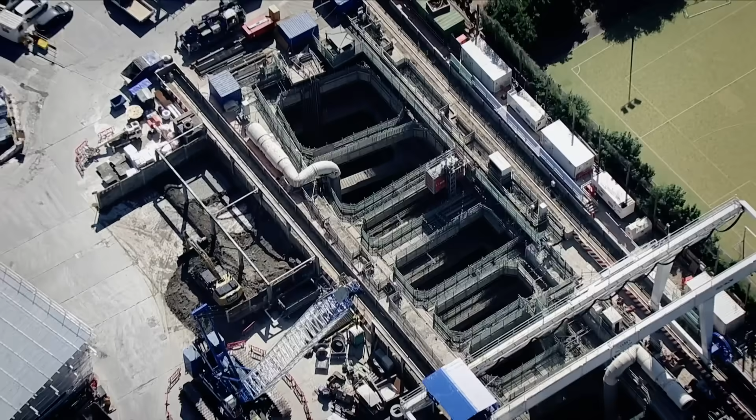In this episode, an incredible rail network driven through London's historic heart. The new Crossrail trains will carry 200 million passengers in and out of London every year. It's very exciting. Pushing urban construction to its limits. These machines allow you to pump 60 tonnes an hour. It's quite an art to see.

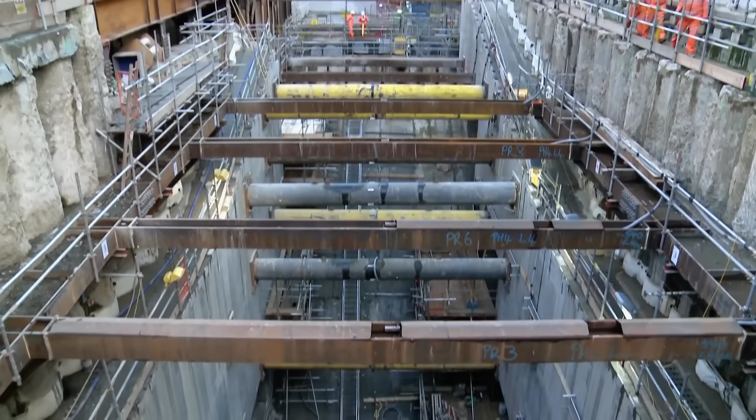And the innovative pioneers of the past. It's amazing that they were able to build this bridge in this torrent. I love the Industrial Revolution. That made the impossible possible.

London, one of the world's most populated and densely built megacities. This mighty metropolis covers an area of nearly 1,600 square kilometres. But now home to almost 9 million people, with a further 31 million visitors each year, this cosmopolitan capital is grinding to a halt.

It's a problem that engineer and commuter Camilla Barrow experiences every day. London's a fantastic place to live. Everyone wants to be here. There's a lot going on. However, catering for these people in terms of transportation is critical, and as you can see right now, it's bursting at the seams. Every day, more than 11 million journeys are made on London's transport network, including 3.5 million on

the London Underground alone. The current London Underground is about 150 years old, and it's a fantastic system and caters for a large capacity. However, it was never anticipated that it would cater for this amount of people. To solve this seemingly insurmountable problem, engineers have embarked upon Europe's biggest construction project.

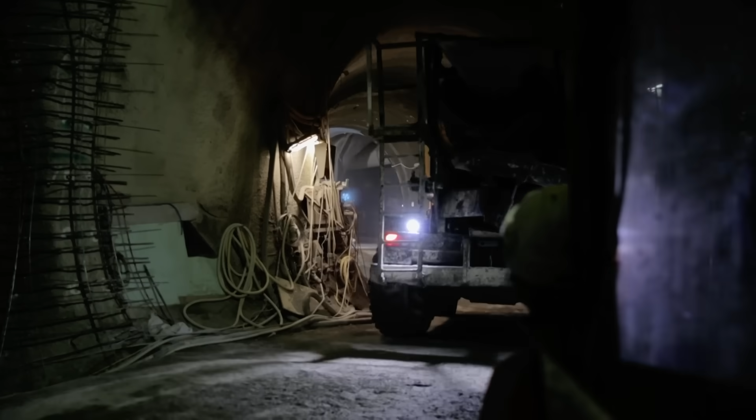10,000 workers spread across 40 different construction sites are creating a brand new rail network straight through the capital's heart. For Operations Executive Michael Bryant, this project presents a series of complex challenges. London's infrastructure is 300 years old, and underneath London is a veritable labyrinth of tunnels for all sorts of purposes. It literally looks like a hairnet that's been screwed up.

It's extremely complex. Lots of the buildings now, particularly the large buildings like the Shard, have piles that go down 20, 30 or even 40 metres down into the chalk level. So it really is like threading a needle.

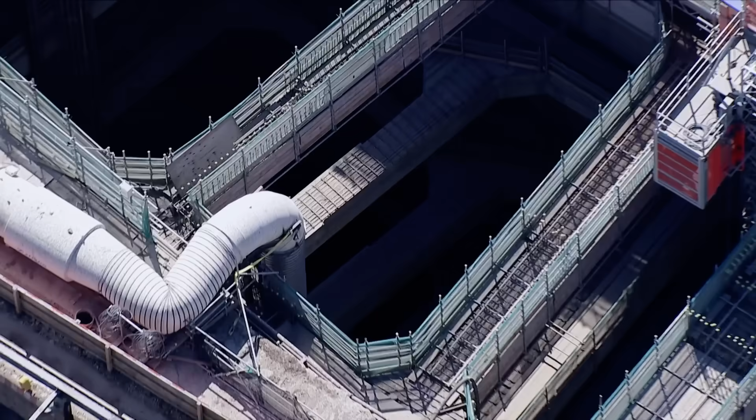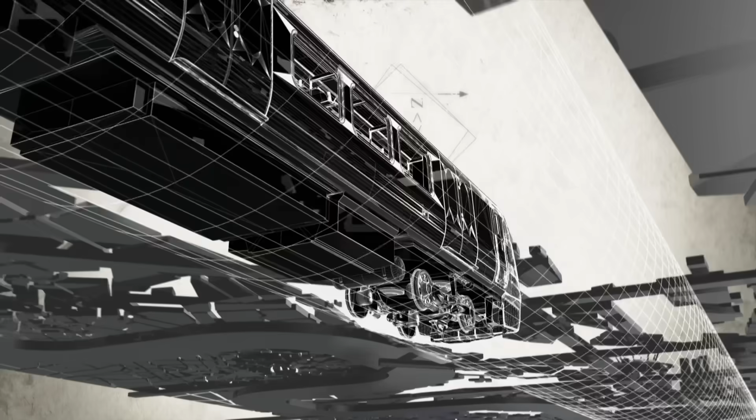Stretching 118 kilometres, the network will pass through 40 stations, from Reading and Heathrow in the west to Shenfield and Abbey Wood in the east. Featuring an astonishing 42 kilometres of freshly dug tunnels, intricately woven through the existing underground rail system and deep building foundations of this complex subterranean world.

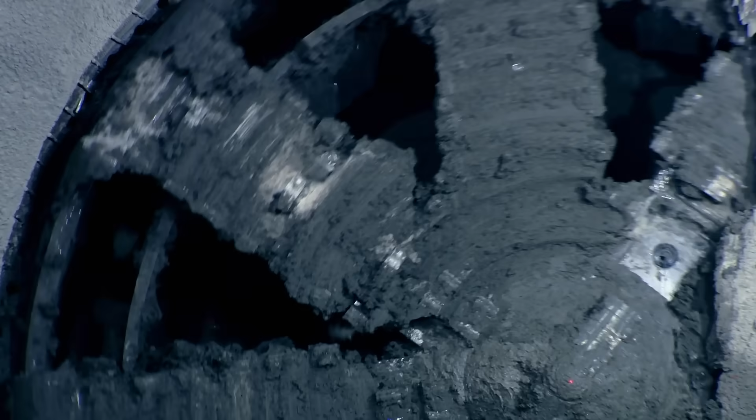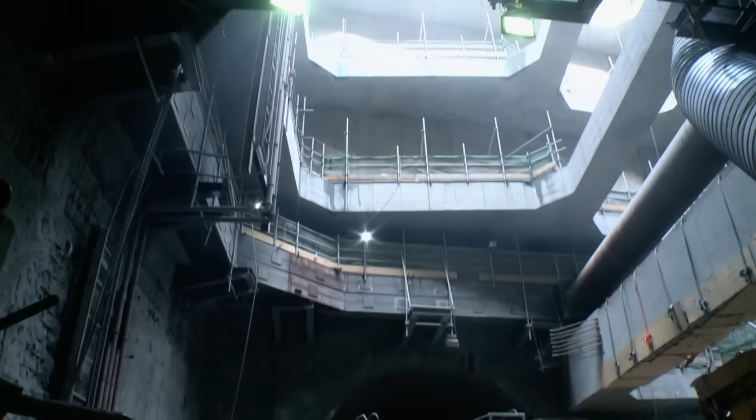In 2012, 8 gigantic 1,000-ton tunnel boring machines operating 24 hours a day, 7 days a week, begin creating this new network. Right now, Crossrail is a mega project. It's very complex. It's costing approximately £15 billion. It's probably the type of challenge that a civil engineer would dream of through most of his or her career.

And not only do these engineers need to find room for 42 kilometres of new tunnels, but also create space to accommodate 10 brand new stations. The most vital of all will serve one of the world's leading financial districts, Canary Wharf.

One of the biggest problems when we wanted to bring Crossrail to Canary Wharf was finding the space to do it. All of the land is full, as you can see up there, so the only place to do it was in the water. The challenge was to deliver a concrete box 28 metres below water level. The option of failure just did not exist.

So, how do you create a brand new station deep in the water of the River Thames? To realise that seemingly impossible challenge, engineers would take inspiration from some of the greatest innovators of the past.

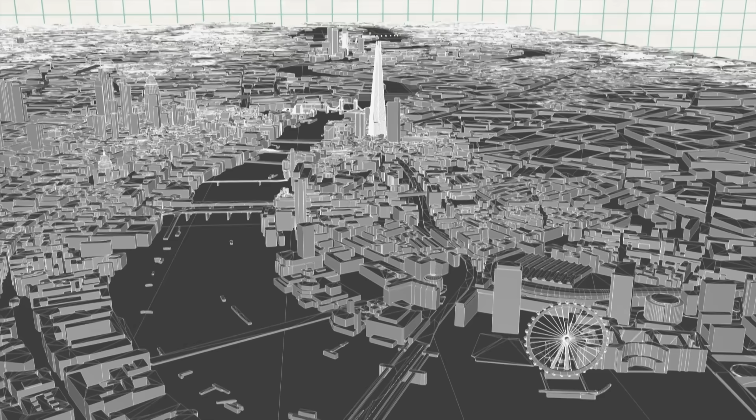Travelling along Rome's River Tiber, Professor Rees-Morgan is in search of an ancient structure that has withstood the power of nature for millennia. Oh, wow. It's amazing that they were able to build this bridge thousands of years ago in this torrent. Oh! Constructed in 62 BC, the Pons Fabricius is the oldest Roman bridge still standing.

Oh, wow, that was fantastic. I'm totally soaked. There's a real strong current there. The foundations must be extraordinary to deal with that river. Thousands of floods, earthquakes, countless wars, and millions of horses, carriages, and people have all put pressure on the foundations of this bridge. But still, it endures.

It was commissioned by Lucius Fabricius, the curator of roads, after the previous wooden bridge had burnt down. The very core of the bridge, the foundation in the centre, is where the clever bit happened over 2,000 years ago. Unable to simply stop the river and drain the water out so they had a dry environment to build on, the Roman engineers had to come up with a revolutionary method of building while the water was in full flow. What they designed was ingenious.

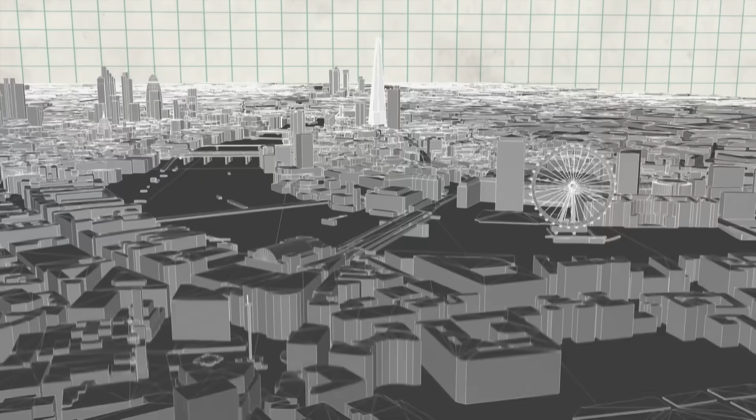The ingenious use of a cofferdam at the Pons Fabricius means this 62-metre bridge still stands as a testament to Roman innovation. When it came to building solid structures in the water, Roman engineers really did make the impossible possible. The engineers at Canary Wharf in London take the Romans' cofferdam and employ it on a gigantic scale.

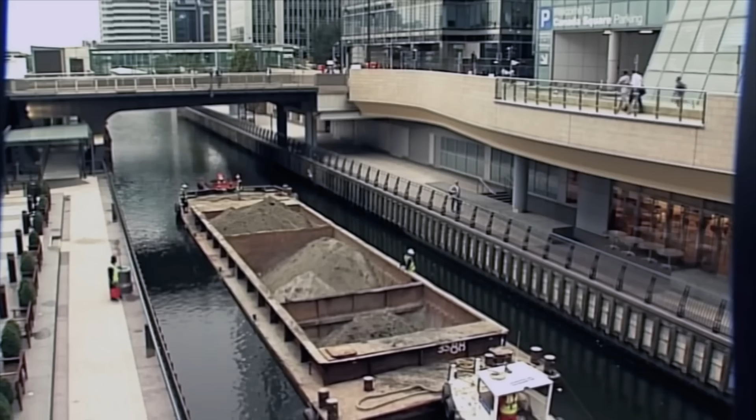To build a brand new 250-metre-long station in water, engineers drive nearly 400 18.5-metre-long tubular steel piles into the dock floor to create a state-of-the-art cofferdam, vastly bigger than that used at the Pons Fabricius. But constructing it isn't without its challenges, especially when leading financial institutions with sensitive trading floors are your neighbours.

The traditional method of creating a cofferdam is actually to hammer steel members into the ground. And as you can imagine, that makes a lot of noise, a lot of vibration, creates a lot of dust, major disruption. So we had to come up with something that was better. The answer to their problem is a brand new technique of silent piling. Instead of hammering the piles, a state-of-the-art Japanese machine called a Giken is used.

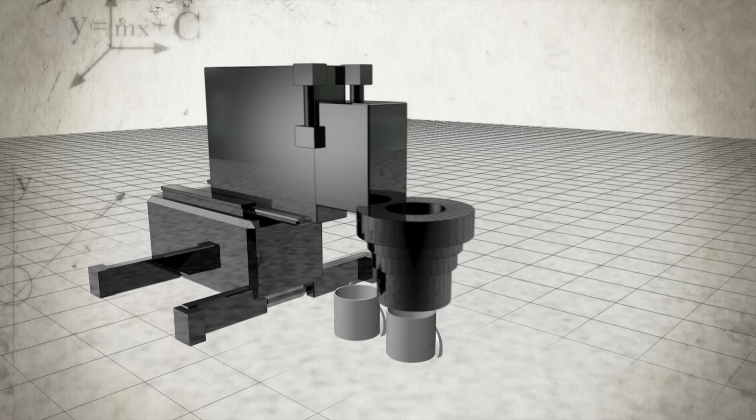Weighted to the dock bed and using powerful hydraulics, it silently twists and pushes the first 3 piles into the ground. It then crawls across and secures itself to those piles, using them as anchors, before pushing in the next one. This process is repeated until the cofferdam wall is complete. We went for the first 3 years of the project without a single complaint from any of the neighbours.

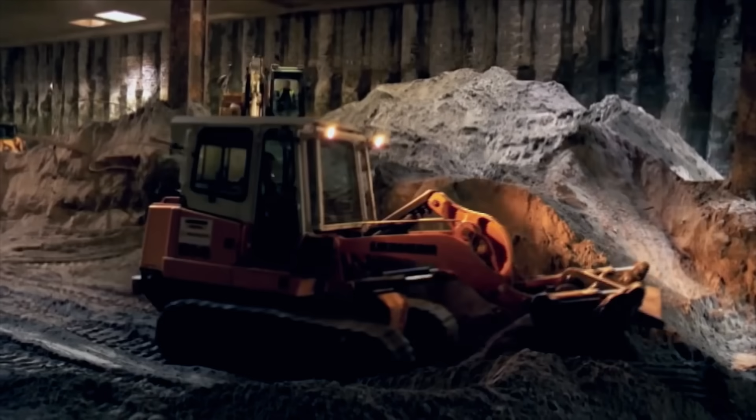Once the cofferdam walls are in place, engineers can begin the mammoth task of removing the water. Over the next 5 weeks, we progressively took out 98 million litres of water from the cofferdam, and that's equivalent to 40 Olympic swimming pools. 300,000 tonnes of material are then excavated, until finally engineers reach a solid foundation, 18 metres below, from which to begin construction.

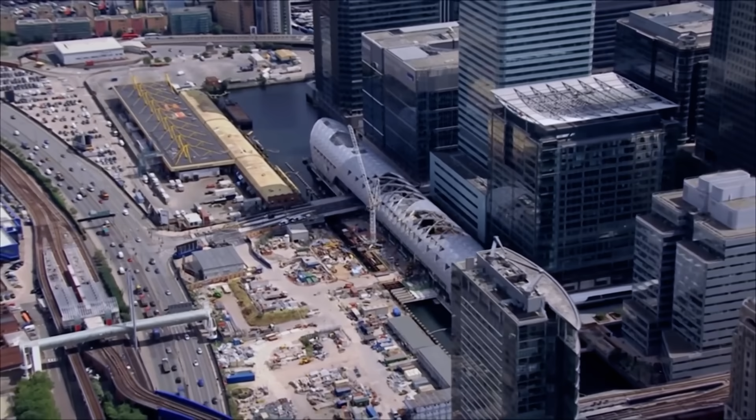When fully operational, this £500 million station will be one of the largest and busiest on the new network. So we have 4 floors below water, a floor at water level that we call promenade, and then there's 2 floors above and a roof garden.

At maximum capacity, 24 trains an hour will carry a staggering 68,000 passengers a day across the network, quicker than ever before. To deliver this station ahead of time and within budget is a monumental achievement, and we're helping London take the next step forward.

But creating this mega station is just part of the £15 billion project. To complete the network, engineers will need the innovative trailblazers of the past. For centuries, Dieppe had significant maritime importance. French explorers have left here to travel the globe. To help create more impossible engineering.

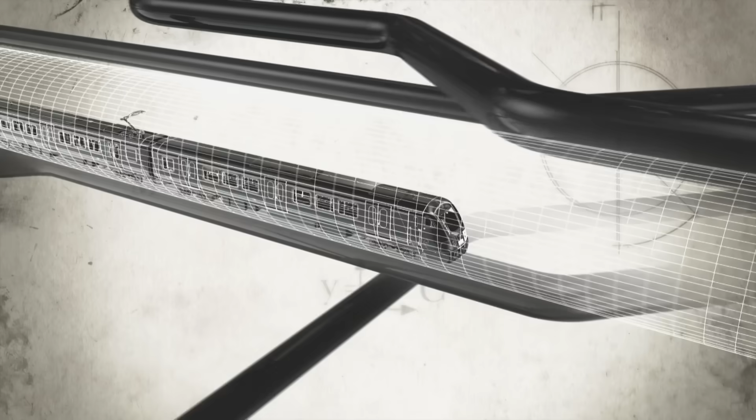Deep below the surface of the UK's capital city, Europe's biggest construction project is underway. 42 kilometres of tunnels and 10 brand new stations, threaded through a complicated and busy subterranean world. Crossrail will enable an extra 1.5 million people to enter or be within 45 minutes of central London. It's a fantastic project. You're working with some of the top expertise in the industry. It's very exciting.

But creating a colossal new railway above and below one of the planet's most densely packed cities throws up significant engineering challenges. The most obvious issues with building a project as large as Crossrail within central London is working around this massive infrastructure that's already in place. We've got people living here, people working here. So we aim to really minimise the amount of disruption to the people, the noise, vibrations.

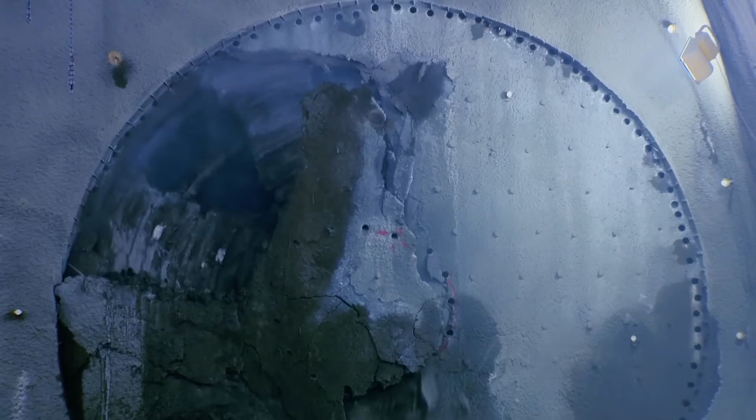Carving out this labyrinth 40 metres underground requires 8 £10 million supersized tunnel boring machines, each 23 feet in diameter and as long as 14 London double-decker buses. For project manager Jules Boyd, making sure London's infrastructure and residents remain unimpacted by these enormous excavations are top priorities.

One of the constraints on the Crossrail operation, which is a massive operation, is to virtually pass by unnoticed to our neighbours. This is Finsbury Circus, a little oasis within the City of London. The buildings around us are old, they're sensitive, some of them are listed.

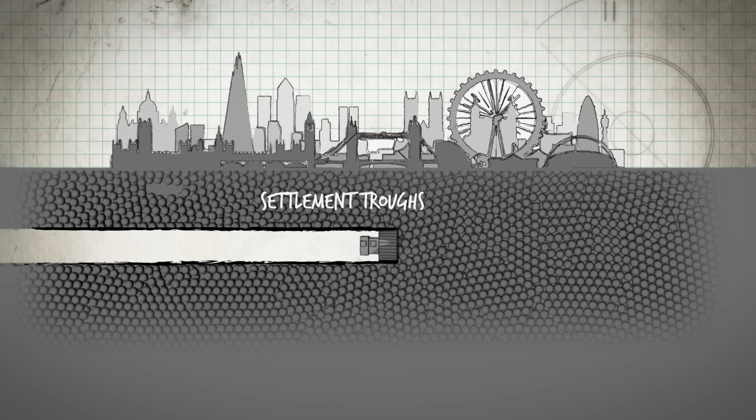When the tunnels are dug, problems can occur as the surrounding earth resettles, causing cavities or settlement troughs to appear. If the settlement trough increases, a building's foundations could shift, causing structural damage. This is a real historical centre of London, and it has to be protected. So how can engineers keep these ancient buildings safe? It's a challenge that would require some inspiration from the great innovators of the past.

Tunnelling under cities isn't new. In the 6th century BC, to have a supply of fresh water that couldn't be cut off by enemies, the residents of the Greek city of Samos dug underground aqueducts.

They must be getting thirsty by now. Cheers!

The soft volcanic rock beneath Naples meant huge networks could be dug for businesses, churches, and even a theatre, where Emperor Nero is said to have performed.

Ooh, he's on fire tonight.

Limestone mining under Paris created tunnels for what would become the world-famous catacombs, where the bones of 6 million former inhabitants now reside.

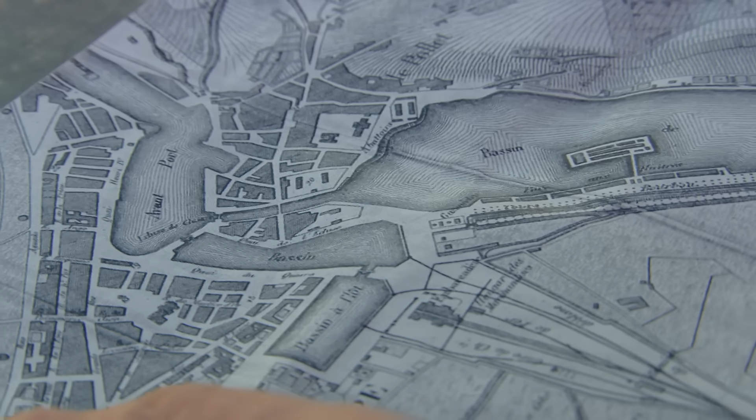I've got a couple of maps here of the old harbour, and it's changed significantly over time. But what I'm looking for is a particularly important sluice gate that helped the big ships come into the port behind me. It must have been just about here, because as I walk around, I can see from the old buildings we come to much more modern buildings, and it's really open. And I imagine it would have been just around here. This large sluice gate would have opened, allowing the ships to come in and out of the harbour.

The gate had been constructed to stop the build-up of silt and pebble deposits, and was a vital tool in keeping the harbour entrance clear. It was around about the end of the 18th century that the sluice gate stopped working, and this had a real impact on the economy. The gate foundations no longer held their weight, causing them to stop working. Luckily, in 1802, French civil engineer Charles Berigny, employed to manage the harbour, had an inspired idea.

So this is my demonstration of the sluice gate and the problem that was happening underneath. First of all, we had the rocks on the bottom of the seabed. On top of the rock was a softer top layer. And it was on top of this softer top layer that the foundations of the sluice gate sat. Now the problem was that the water coming in through the harbour was going underneath the foundations of the sluice gate, and it started washing away and eroding the softer particles of the top layer. And that meant that the foundations of the sluice gate would be destabilised, and ultimately the sluice gate stopped working.

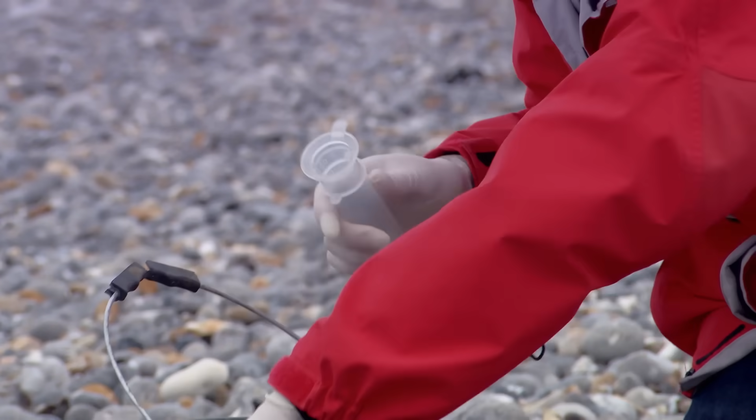Berigny's solution to the problem was brilliant. First of all, Berigny drilled a series of holes 5 foot deep through the foundations of the sluice gate down into the soil where it had eroded away. And then, this was the really ingenious bit, he got a piston pump, what he called a blow pump, and he filled that with clay grout. And with a series of hammer blows, he forced the cement down into the soil below.

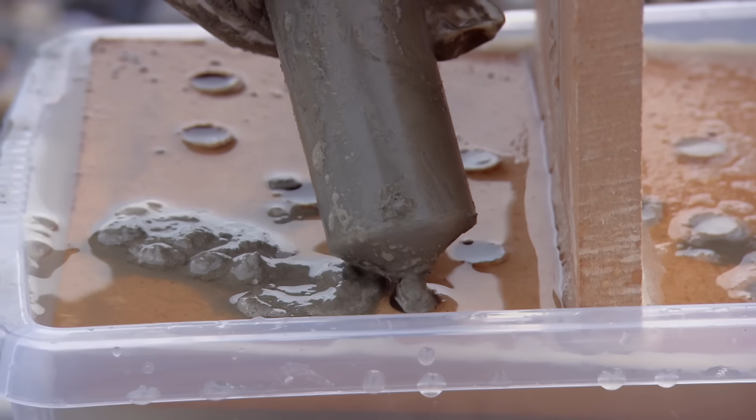This is getting a bit messy, so I'm just going to squeeze it. Down you go, in you go. The cement's pouring through the holes, filling up the subsoil below, and making those foundations nice and stable. As Berigny's clay grout was hammered through the pre-drilled holes, it spread out beneath the masonry foundations, squeezing into and filling the gaps created by the erosion. After a period of time, the grout set hard.

Okay, we've left it a while. We're going to see how it's set. Wow, it actually has worked. God, I really didn't think it was going to work, but that's fantastic. And unlike the soil, which was washed away, because it's solidified, it just stays in place, and that would have really helped the foundations of the sluice gate.

After minor tweaks to the technique, the grouting was completed, and the work proved a resounding success. This was the very first example from Charles Berigny of injection grouting, and it's used in civil engineering projects all over the world today. Fantastic.

Engineers at Crossrail have taken those early injection techniques and developed one of the most sophisticated systems in the world, one which begins above ground. Up on the corner of this building, there is one of the many ATSs. There's another one up here, and you'll see targets. These are essentially prisms. High-tech surveying instruments known as automatic total stations, or ATSs, are placed strategically across the city.

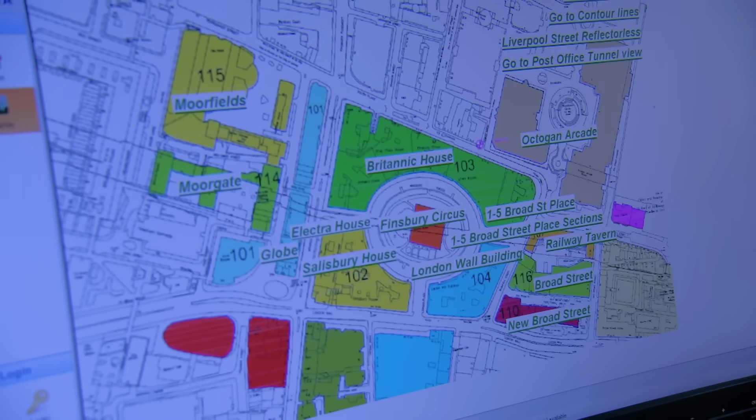The ATS fires a beam of light at its reciprocal prism. Engineers use specialized computer software to continuously measure the angle of the beam. If the angle changes too much, this can indicate a shift in the foundations. If any of these points starts moving, then the grouting program can be tuned to actually compensate for any settlement.

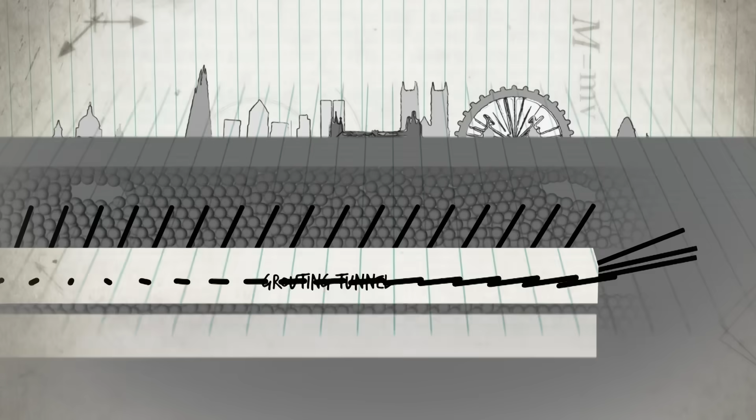Below the ground, in a purpose-built grouting tunnel, the team are busy reacting to recent information received from the ATSs above. At 3-meter intervals along the length of the grouting tunnel are a series of injection pipes that fan out above the construction work and below the delicate buildings. Getting the grout to where it's needed is the job of Principal Engineer Cliff Kettle.

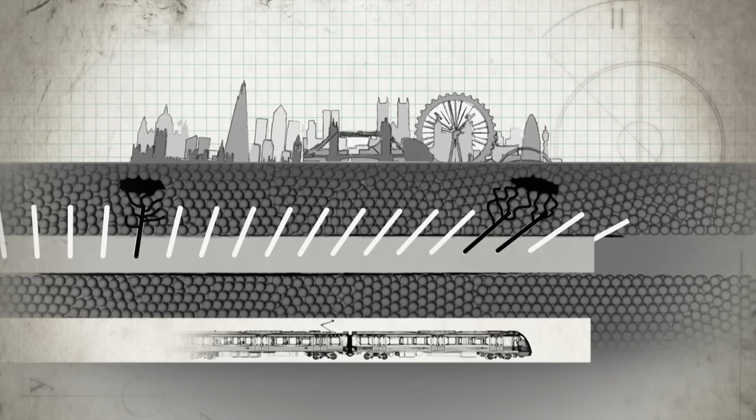So grout comes via the injection line from the piloted pump. It will come up this borehole. We'll isolate the individual sleeve. This rubber sleeve will push open. The grout will exit here and fracture the ground, and it will go into the ground. As the injection rods are pushed into position, up to 25 litres of grout at a time are forced out through the rod and into the fissures of the ground, ultimately levelling the foundations and lifting the building back into place.

Some of the facades of these buildings here are 70,000 tonnes. We see on a daily basis that just the injection of maybe 3 or 4 cubic metres of grout can move that building several millimetres. Spanning 5 years, it's the biggest compensation project the world has ever seen. Compensation grouting is absolutely vital for the project because it does something that there is no other process for. There are many locations across Crossrail where the excavation couldn't have been completed without the protection provided by compensation grouting.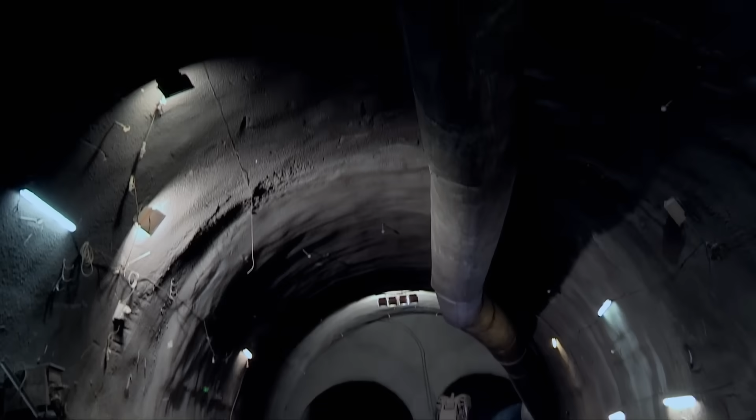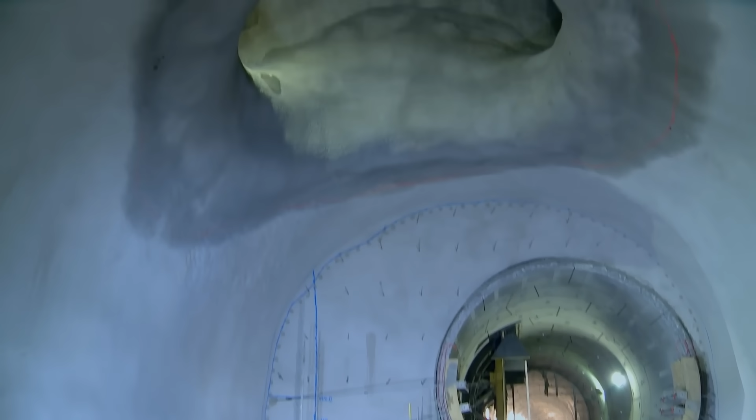In London, engineers are achieving the seemingly impossible, weaving a brand new rail network over and under this city's congested core. Crossrail is a fantastic project. Every day there's a new challenge, there's a lot going on, a lot to keep you stretched, a lot to keep you interested, and a lot of big problems to solve. And one problem in particular is keeping project manager Jules Boyd especially busy.

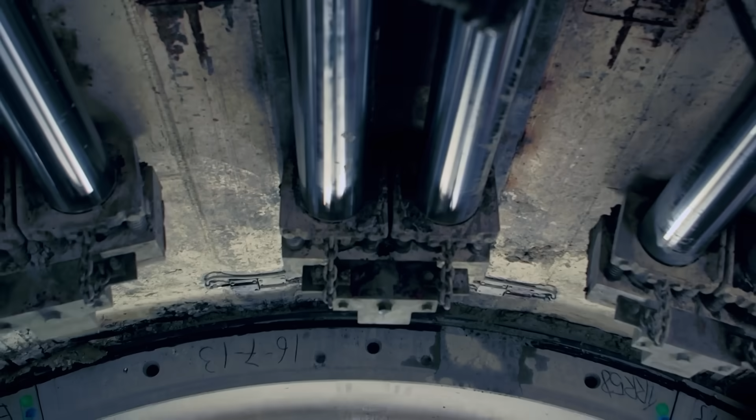Throughout the network, a large proportion of the running tunnels have been excavated by the purpose-built tunnel boring machines. The TBM's obviously a big machine, it's a factory, it builds segments of one size, it's building very fast. As TBMs dig, they automatically line the freshly exposed clay with prefabricated concrete slabs, quickly shoring up and sealing the walls. But when they arrive at a station, these massive machines have their limitations.

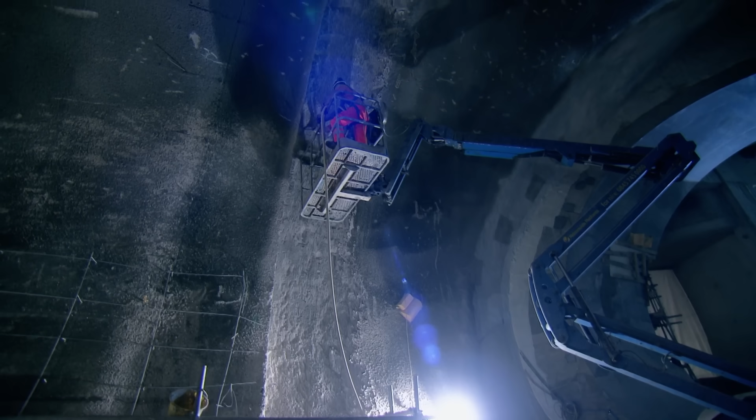It's not very flexible in terms of size, it will build one size tunnel only, which is what it's made to do. The platform tunnels here, for example, are 10 metres in diameter. They're 250 metres long. You would never do those with a TBM. To dig these varied cathedral-like spaces, engineers have turned to the more conventional excavating machines. But if the freshly exposed clay is left unlined for too long, it could collapse. So how do you quickly shore up the more complex and cavernous spaces across the network that aren't automatically lined? To do that, engineers would need to draw on the work of an unlikely innovator.

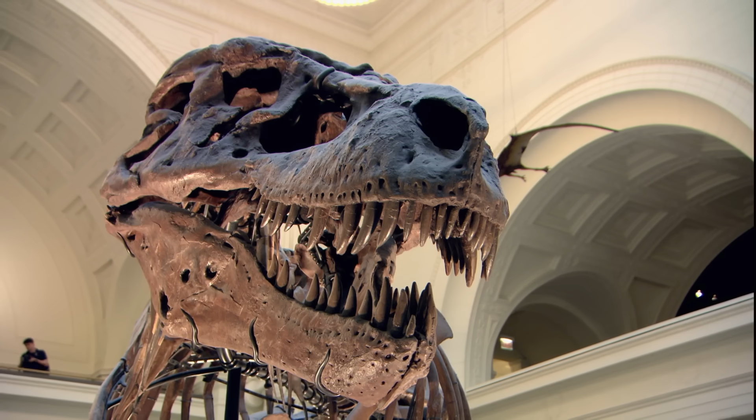At the famed Natural History Field Museum in Chicago, science administrator Mark Alvey is discovering how one man's passion for preservation helped create a revolutionary engineering tool. These are the Field Museum's famous fighting bull elephants. They were mounted over 100 years ago, and they're still one of our most iconic exhibits. Created by explorer and so-called father of modern taxidermy Carl Akeley, they mark a milestone in natural history display. Carl Akeley was the museum's chief taxidermist from 1896 to 1909, and he experimented with various sculpting techniques involving clay and plaster. His techniques were really revolutionary.

Not only did Akeley want to display the animals in lifelike detail, but their surrounding environment too. And the techniques that he used in creating artificial rocks, like the ones you see here, eventually led to an innovation that would really have a huge impact on the engineering world.

It was during his search for lifelike perfection that Akeley came up with a new way of covering fake rocks with plaster of Paris. So here we have a small rock that you might see used in a zoo enclosure. You can see that if we were to try to paint it by hand, it would be very tiring and end up with very uneven results. Now if I use my gun here, you can see you get a much more even consistency. It goes on faster. You can cover your surface much more quickly.

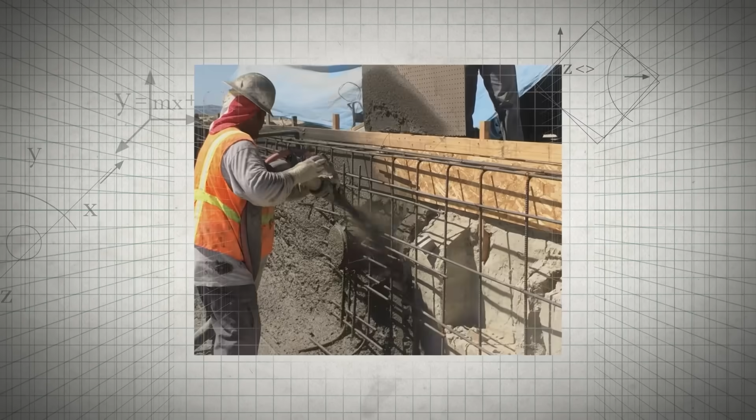What Akeley achieved would be a template for all modern cement guns across the world, emphatically transforming the construction industry. It's been used for anything from bespoke architecture to pool lining and even cliff stabilization. Carl Akeley was a real pioneer. His contributions to the world of engineering are truly remarkable.

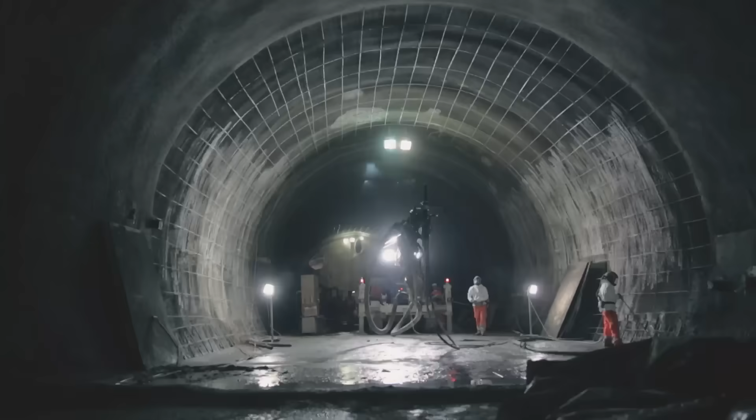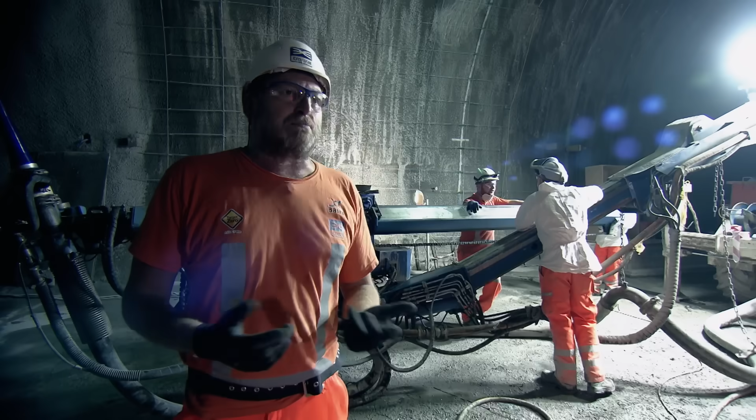At Crossrail, a pre-mixed wet concrete known as Shotcrete is pumped through a specially adapted, super-sized, automated version of Akeley's machine. At the nozzle end, high-pressure air is used to accelerate the mix towards its target. The mixer truck will bring in the concrete to this Shotcrete robot here, which is basically a pump and a manipulator so that the nozzle man, who is this chap here, can place the Shotcrete in exactly the right place.

Historically, people used to spray by hand. These machines allow you to pump up to maybe 60 tons an hour. The technique involves rapidly spraying the freshly excavated ground with a sophisticated, fast-curing mix of shotcrete to stabilise it and form the permanent tunnel lining. This is the Shotcrete, which is essentially a concrete mix with small aggregate. It's got these things which are like small high tensile steel fibres. They're like reinforcing bar effectively on a micro scale.

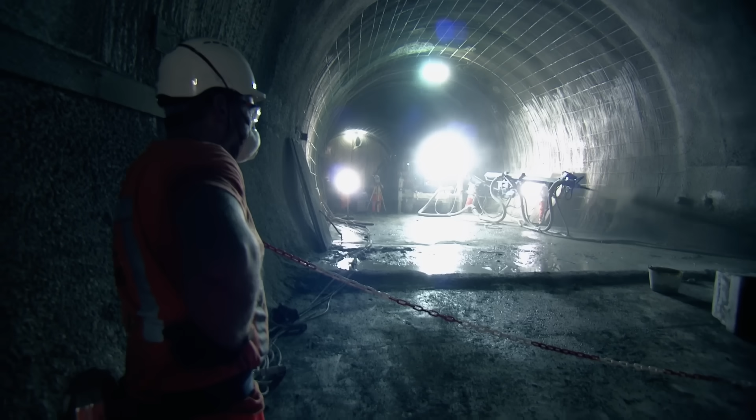I've worked on quite a lot of tunnels. This is exciting. There's a lot going on. You're always up against pressure for programme, pressures against cost, and we're changing the culture for one that is infinitely more safe than it has been historically.

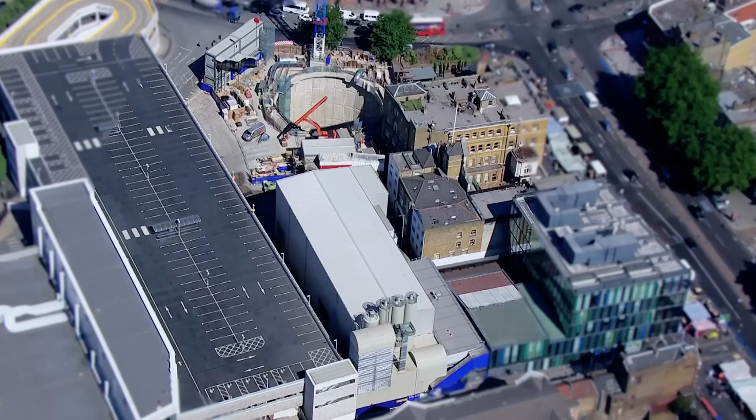With a staggering 42 kilometres of brand new tunnels now constructed, the momentous task of creating a high-tech railway is underway. We're now in our tunnel fit-out phase. We're putting in our ventilation, all our high voltage power and signalling, and it's starting to look like how it looked when trains would run through it. And one of the biggest jobs is laying the track itself.

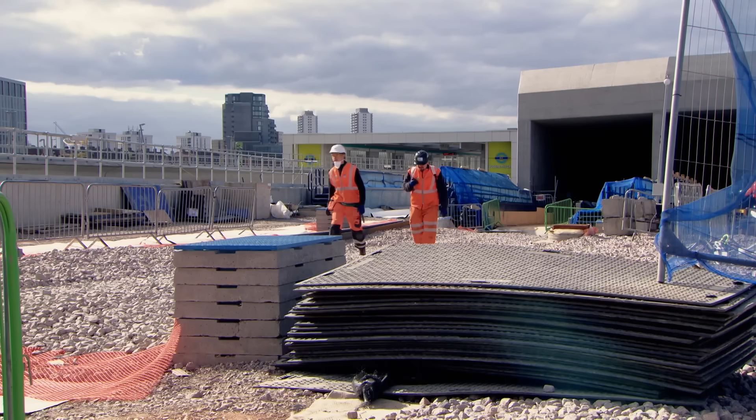On our project we have 4 different types of track. There's approximately 108 metres each section, and you've got about 47 kilometres of this across the project. So how can the team efficiently install tens of kilometres of rail track throughout the extensive tunnels? To answer that seemingly impossible challenge, engineers draw inspiration from some of history's greatest innovators.

Architectural historian Jen Mason-Garb is in California, discovering the secrets behind one of the USA's most audacious construction projects. Today, there are over 150,000 miles of rail track across the continent. But in the early 1800s, it would have taken more than 6 months to cross the continent by horse. But all that changed on July 1st, 1862.

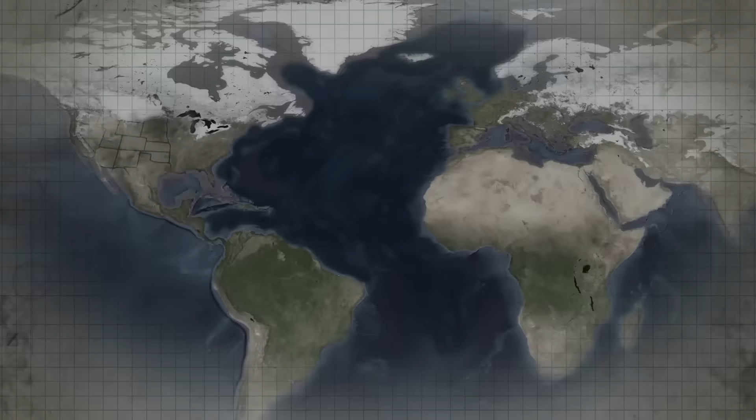The signing of the Pacific Railway Act by Abraham Lincoln authorized 2 companies to build an 1,800-mile-long railroad between California and Nebraska. This new railroad would allow people to cross the entire continent by train, a project of staggering ambition. And the 2 railroad companies had an incentive to move fast because they were paid by the mile, $32,000 per mile. And so they were off.

Union Pacific starting in the east and moving west, Central Pacific starting in the west and moving east, racing across the continent to each other. Despite the challenging terrain, Union Pacific workers were soon laying 4.2 miles of track a day. Key to this remarkable achievement was a method devised by 2 brothers, Jack and Dan Casement. The Casement brothers had just come from the Civil War, where they served as officers, and they were in charge of laying all the track for Union Pacific. They ran this track operation with military precision.

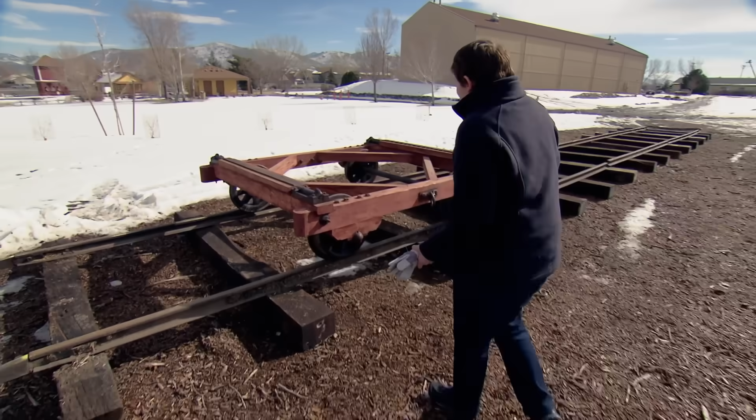The Casement method involved creating an entire moving city. Locomotives would pull sleeping berths, dining cars and kitchens, providing everything for thousands of workers. The key to the Casement brothers' success wasn't just in the efficiency of the workforce, but also in the really smart engineering systems that they designed. This might look like just a simple cart, but it's got a couple really cool features.

Each cart had these 2 iron bars along the front and the back, which made it possible for the iron rails to slide to the edge. And then these rollers positioned the rail right into place so it could be slid right down on the ties. It saved valuable seconds, and all those seconds added up along the project really made a difference.

For the ingenious cart to be effective, the workers were split into 2 teams. I've got this team of guys ready behind me, and we're gonna give it a shot. All right, team, ready?

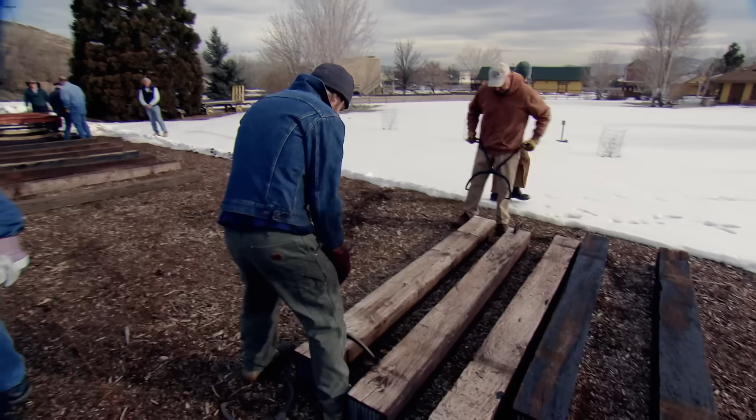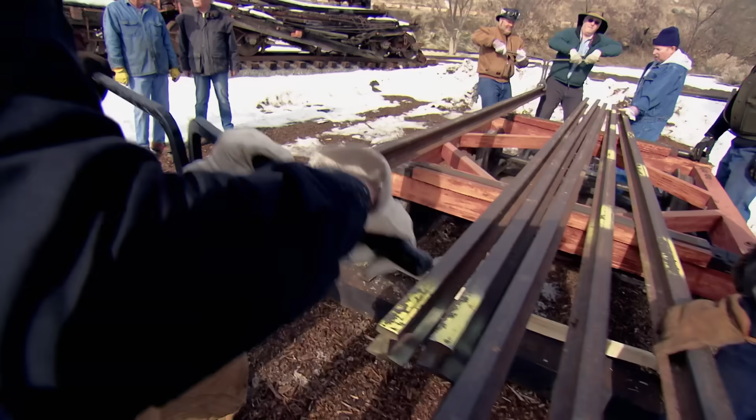The first team would use a horse and wagon to deliver the sleepers to the front of the line, laying them in place with a pair of tongs. At the same time, another crew would be in the back, lifting the rails into position on this cart. 2 men at the front of each rail, 2 men at the back, and then this cart would be pushed to the front of the line.

Rail out. As the cart moved into position, it was the responsibility of 2 workers at the front to grab the rail with their tongs and pull it off the cart, and then 2 workers in the back to align the 2 rails. We'd be called the heelers. And when the track was in place, the foreman would yell, "Good iron," and the cart would move forward.

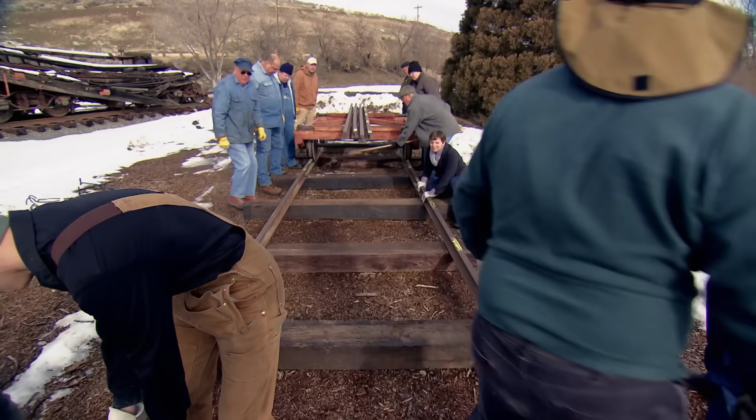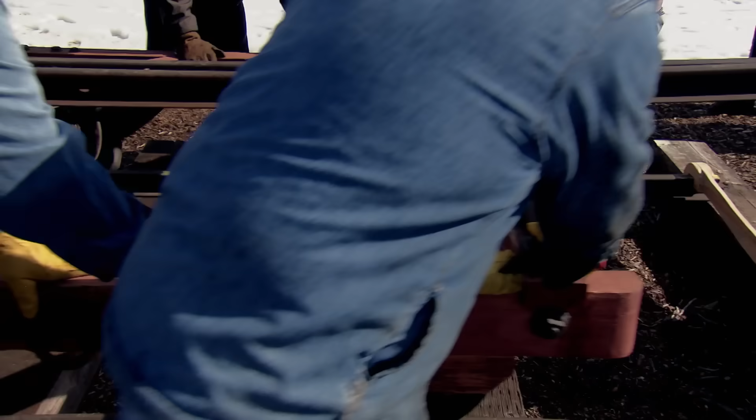Good iron. Roll ahead. Behind the cart would be other men called strappers, who'd splice the rails together at the joins. Behind the strappers, spikers secured the rails to the sleepers with spikes. Good. Once the rails had all been laid, this empty cart would be pushed to the end of the line and tipped up on its side so that a new car could come behind with all new fresh rails. All right, are we ready? 1, 2, 3.

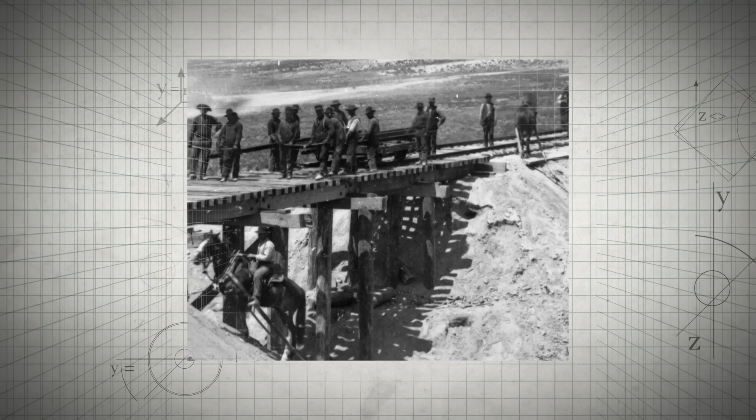Hearing of its success, Central Pacific also adopted the technique, and work on the new line raced ahead. The Casement method revolutionised track laying, and by the 10th of May 1869, just 5 years after work had started, the 2 construction crews met, and a golden spike was planted to mark the completion of the Transcontinental Railway, one of the world's greatest engineering achievements.

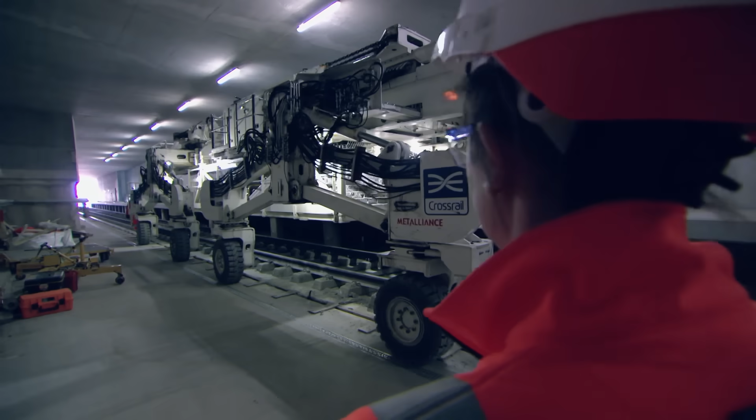At Crossrail, the team are taking those early pioneering track-laying methods and giving them a 21st century makeover. Behind me is the multi-purpose gantry, and really, MPG is a real-life transformer. We have 4 of them on this project that were designed for Crossrail. These modern-day versions of the Casement Brothers trolley cars cost £1 million each, and are the track-laying workhorses during the fitting-out stage.

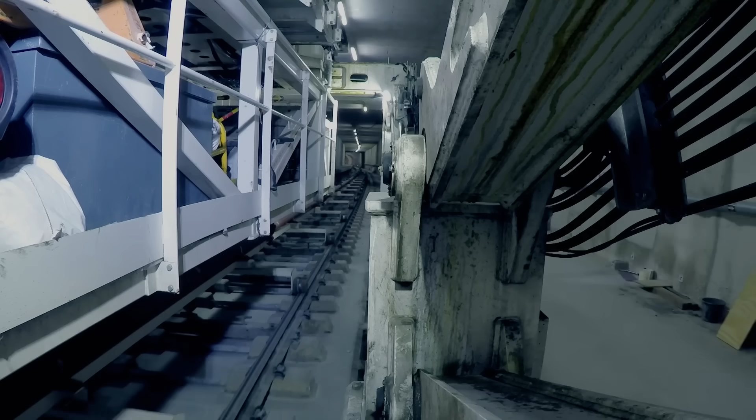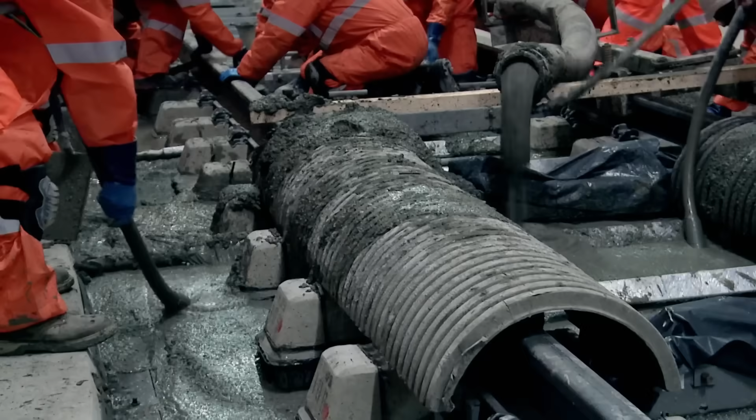To begin, the MPG drags 108-metre-long sections of steel rail into position, placing them on either side of the tunnel floor. You've got approximately 47 kilometres of long welded rail, so a large amount of track we need to install all through utilisation of the MPG. Next, sleepers are positioned in between the rail sections. This MPG can lift up 28 sleepers in one go and position them in exactly the correct location. Across this project, we have about 70,000 sleepers we're trying to lay. Finally, this versatile machine lifts the rail onto the sleepers, and concrete is poured to secure it in position.

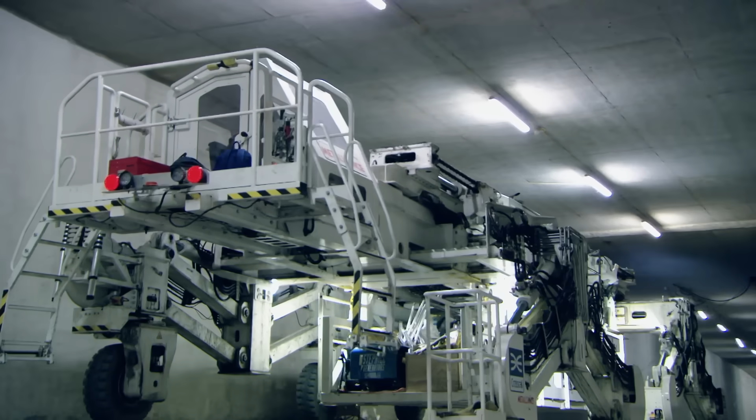The MPGs are very versatile. They can go up and down, and they can move in and out. As you can see here, you've got one wheel up on the platform, one on the upstand. They enable us to work around this challenging environment. Thanks to these 21st century tools, the tunnel fit-out team are well on their way to welcome the first trains through in 2018. The MPGs are real solutions to address the complexities and the magnitude of the tasks we have working in this environment.

Crossrail, Europe's largest infrastructure project, is gearing up to completely change the face of travel for millions across London. Many parts of London's public transport system are virtually full already. Any additional capacity that we can add is going to help hugely. This £15 billion network is in the final stages of construction. The new Crossrail trains will carry 200 million passengers in and out of London every year.

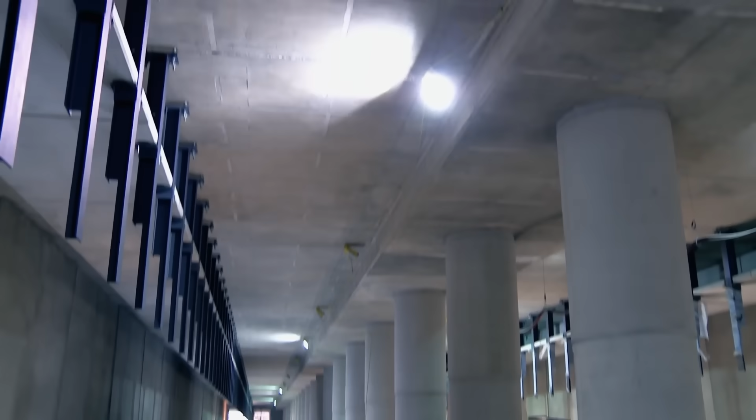So how will engineers transport an extra 200 million passengers safely from street level to stations as much as 40 metres below ground? To answer that challenge, they would look to the uplifting work of an innovator of the past. Mechanical engineer Michael Tobias has come to a thrill-seeker's paradise in Brooklyn, New York, in search of the unlikely origins of an everyday piece of engineering.

This is the world-famous Coney Island, a place that's provided entertainment and thrills to New Yorkers for over 100 years. Up until the 1930s, this iconic attraction was the largest in the US, with 3 parks competing to build the most daring and cutting-edge rides.

Incredible. The rides that were showcased here were truly remarkable pieces of engineering, made by ingenious inventors of their day. But there's one in particular that was more than just a funfair thrill. In 1891, American inventor Jesse Wilfred Reno, keen to attract the attention of the New York railway companies, came up with a publicity stunt to demonstrate his new ride.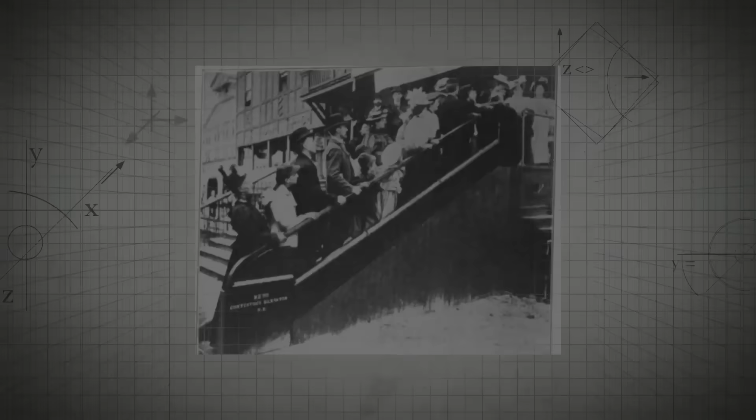Reno's invention was a prototype of the world's first working escalator. It may not sound exciting for today's thrill seekers, but back then it caused a sensation. Named the inclined elevator, Reno's ascending movable walkway is reputed to have carried 75,000 people in just the first few weeks. Reno's design is a sloped walkway, very similar to how a conveyor belt works. There's 2 gears at the top and the bottom, a motor on the top, pulling the walkway up, down, and over again.

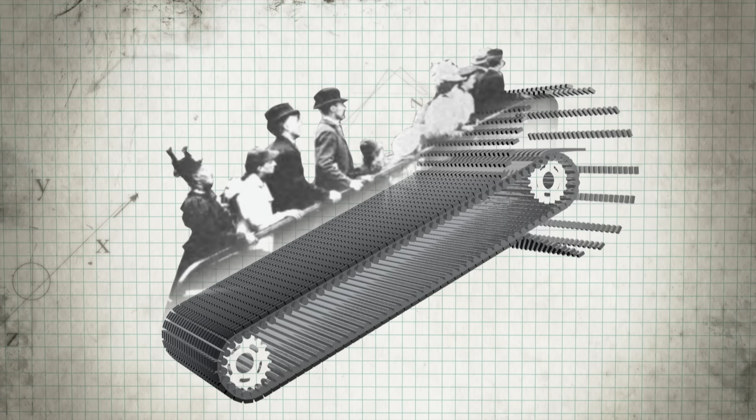With its steep incline of 25 degrees and a 7-foot rise, Reno attached strips of wood or cleats to the treads to provide traction. And most ingenious of all, at the end of the ascent, the cleats disappeared through a reciprocal set of comb-like prongs that safely lifted the passengers' feet off the disappearing treads, enabling continuous motion. Reno's plan worked, and as a result of this publicity stunt, his invention was soon installed in New York's transport system.

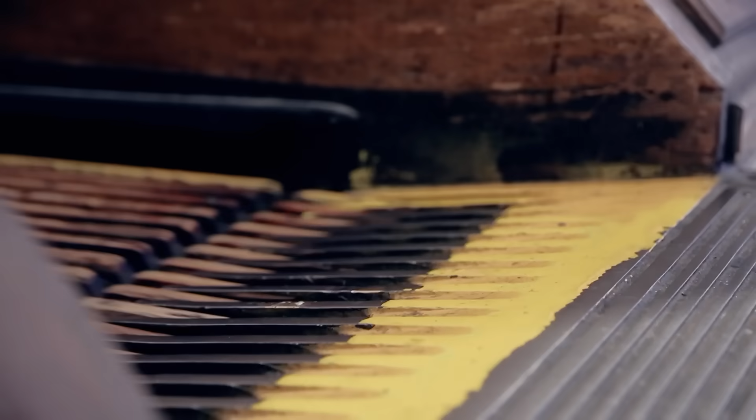Elsewhere in New York, other engineers were also working on their own escalator designs. It was here, at Macy's flagship store, where Elisha Otis, inventor of the elevator, installed one of his earliest escalators. Instead of Reno's steady incline design, Otis's plans incorporated steps. By combining them with Reno's cleat and comb design, the escalator made for a smooth ride and safe exit. Installed in 1927, these are thought to be the world's last remaining wooden step escalators anywhere in the world.

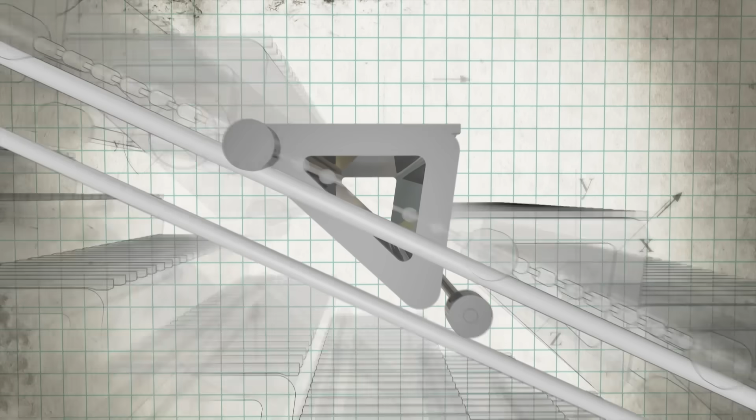Each step in the escalator has 2 sets of wheels, which roll along 2 separate tracks. The upper set are pulled by the rotating chains, while the other sets simply follow behind. The tracks are spaced apart so that each step will always remain level. At the top and bottom of the escalator, the tracks level off to a horizontal position, flattening the stairway. The steps were central to Otis's design, while the cleats on the surface of the steps and the comb plate they disappear into were central to Reno's design. These escalators stand as a testament to the engineering brilliance of the men involved and form the blueprint for all modern escalators.

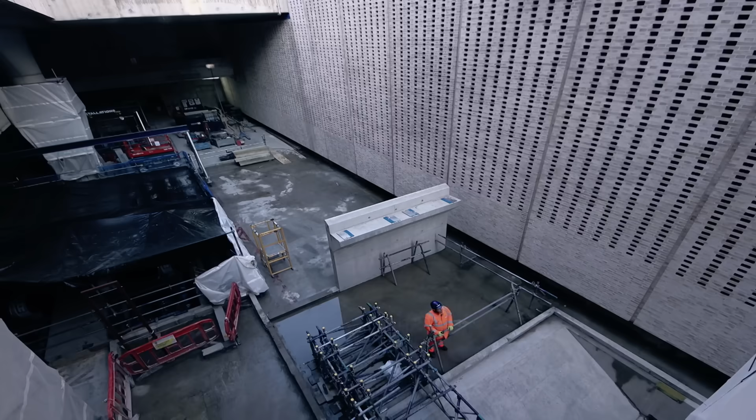Back in London, and a whopping 81 brand new versions of Reno and Otis's design are set to make this new network a step-free zone. But to fit so many, up to 65 meters in length and weighing almost 45 tons, project manager Jules Boyd and his team of engineers have had to create some engineering firsts of their own. Here you see, this is the escalator that all of the passengers that will use Whitechapel Station will come down. It's actually very steep, as you can see.

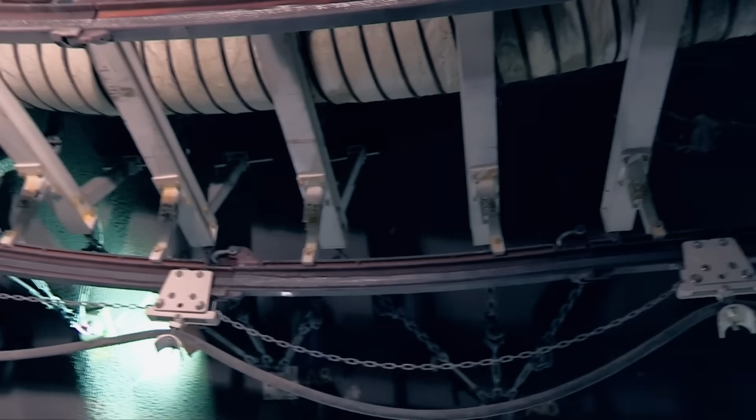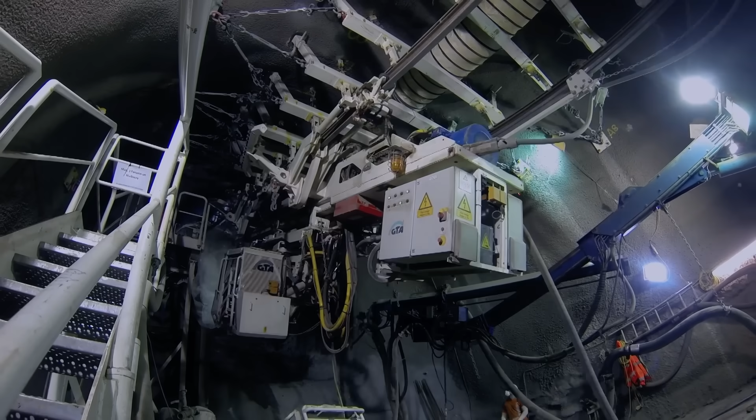Hanging from the rails embedded into the tunnel roof, an especially adapted machine was used to excavate this vast cavern. But instead of digging from the top down in the usual way, limited access above ground meant the spider-like machine clawed its way upwards. This is quite unique. This is the first escalator where the tunnel was done uphill. I'm not aware of that ever being done anywhere in this country before. By cleverly adapting equipment to suit their unique situation, the machine could beat the effects of gravity.

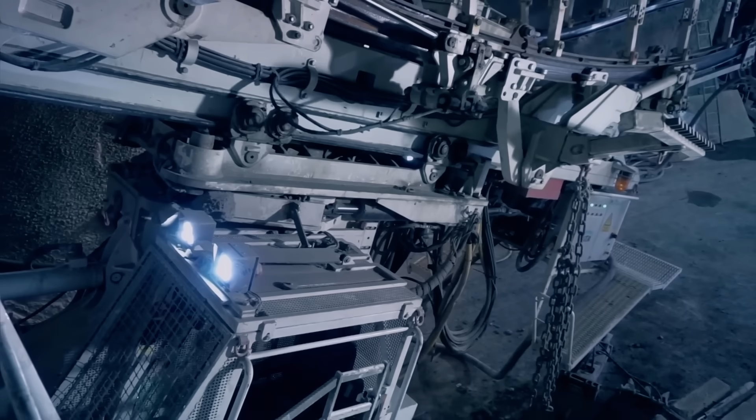Very difficult to do because everything is at 30 degrees. Now, as you can see, it's very awkward to do anything on here because everything rolls away. From there to there, vertically, is about 11 meters. So access is very, very difficult. So it's quite an art to see. Thanks to the dedication of those building them, the 2,500 meters of new escalators will play a pivotal role in delivering the passengers to the platforms below.

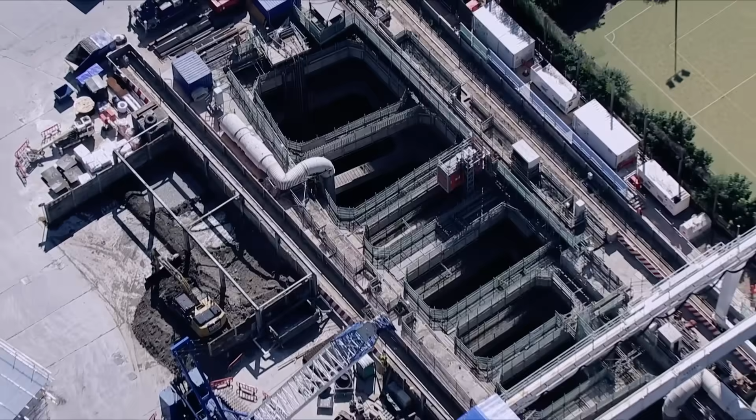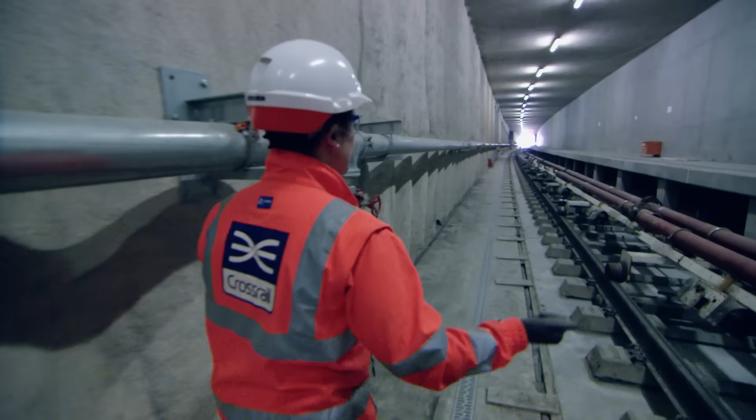The unprecedented and ambitious Crossrail project rewrites the rules of underground construction. When you look at it now, it's amazing to think that in a couple of years' time, this will be open, the Elizabeth line will be up and running and operational. With over 100 million working hours already completed, the success of the largest construction project in Europe stands as testament to the inspirational innovations of the past and the ingenuity of those building it today. To see the whole process from start to finish has just been remarkable. I mean, I'm getting towards the end of my career. I doubt I'll do another one of these, but you never know.

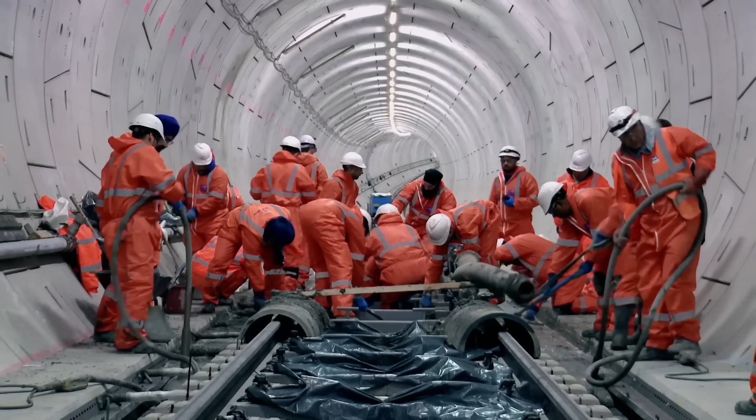On the brink of completion, the enormously complex and groundbreaking Crossrail remains on track and has succeeded in making the impossible possible. If you think of all the thousands of people that worked on this project, the billions of pounds that are spent constructing it, the challenges we've managed to overcome, I think it'll be a fantastic achievement. It's a real feat for the UK rail industry.